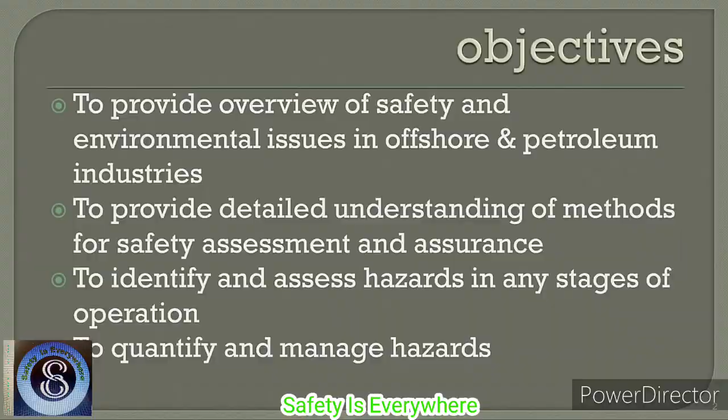One must easily understand how to quantify and manage hazards as applicable to oil and gas industries. It is very important that one should know how to quantify qualitative issues like hazard management. I will come to that in detail in the next class, because when you talk about safety you are always contemplating what is called risk.

So, there are quantitative and qualitative assessments of risk. When you talk about hazards, it is a qualitative measurement, but we must know how to quantify the qualitative measurements of risk involved in oil and gas industries. Let us, ladies and gentlemen, now introduce safety as a fundamental perspective applied to oil and gas industries.

This is a very interesting oil life cycle that you see here. The oil life cycle starts essentially from exploration. It goes to production, because once you identify the wells where there is a potential of oil to be explored, then you start producing oil. After you produce oil, you have to obviously transport this oil from the drilling well site to the place where this oil can be processed. So, obviously one will look at some crude oil pipelines.

The moment I say crude oil, you should understand that whatever oil we produce here in the well offshore cannot be directly used without processing. So, this oil requires to be processed. On the other hand, ladies and gentlemen, once you process this oil, a majority of the explored oil becomes waste, which is disposed of back to the sea, which causes a lot of environmental problems, which we will discuss in a separate module. So, crude oil pipelines are to be laid, which will transport the crude from the explored site or the produced site to the process plants.

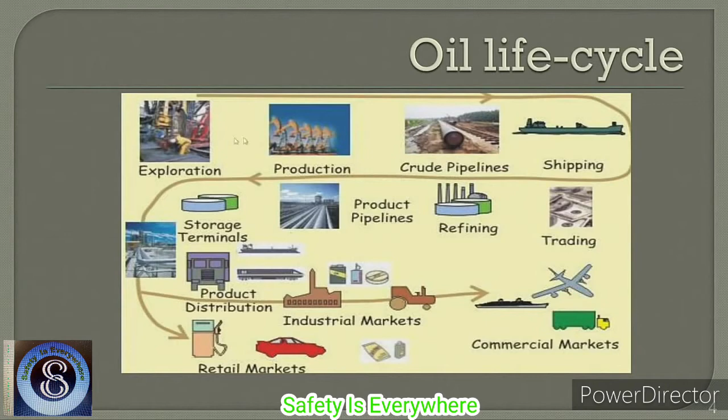You can also talk about safety in terms of design, where we talk about pipeline design. You can talk about safety in transport, maybe in shipping, maybe in commercial markets, maybe in passenger vehicles, maybe road bullets, etc. So, safety or health safety can be addressed in different segments of this oil cycle, which is very important for all of us to understand. So, in this lecture or in this entire course, we will talk about HSE perspective in different segments of what we discussed here in this slide.

Now, one can ask a fundamental question, why safety is to be assured in oil and gas industries. Every segment of a process industry or manufacturing industry demands and emphasizes safety, because safety has become an inherent law of any manufacturing unit where human or personal safety is to be ascertained. Now, let us ask this question once again, why safety is important, why it is to be assured in oil and gas industries.

Oil and gas industries make continuous technological progress. We all know this because of a fundamental reason. Oil was available at shallow depths about 100 years back. Now, oil and gas are available at deep and ultra deep water depths. Obviously, the technology used for extracting or exploring oil and gas from shallow water is completely different from that being used for deep and ultra deep waters.

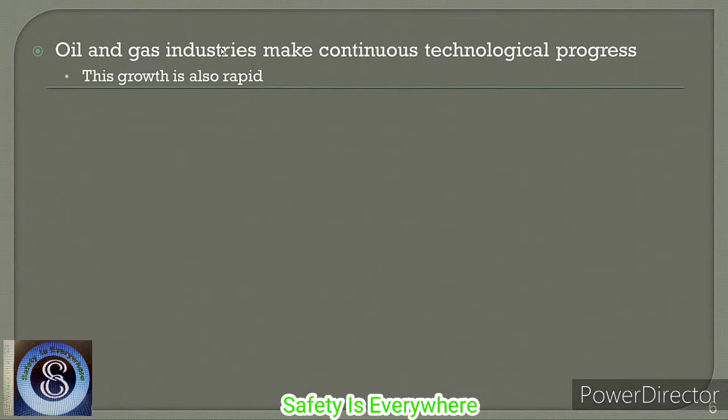So, there is a continuous technological progress made by these industries, and obviously the growth of this industry, to be proud to say so, is very rapid. It means this industry is foreseeing a very rapid state of growth in every year to come.

How does this affect safety? As I said just now, there are different complexities involved at the exploration stage, transportation stage, and also the processing stage in a given oil sector. Interestingly, the complexities involved in these stages are entirely different. The safety as applied to the exploration stage can be a different perspective compared to that of transportation and compared to that of the processing stage as well.

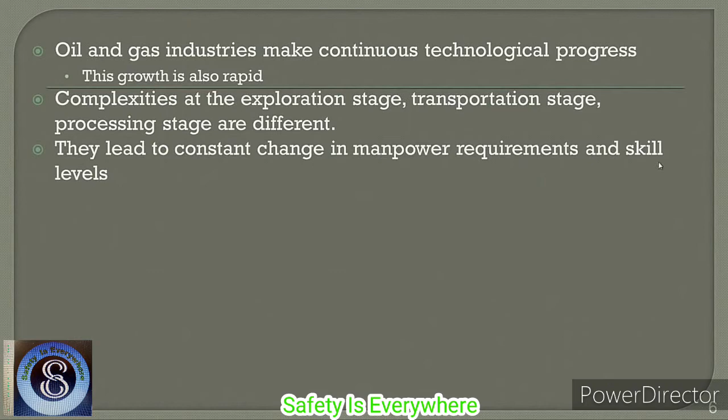Oil and gas industries, of course, lead to a constant change in manpower requirements, because the plants, equipment and machinery used for drilling in the present scenario are different from the concepts used about 50 years back. So, there has been constant technological progress in this industry, which demands a constant change in manpower requirement, and the corresponding skill level of this manpower is also constantly updated.

More interestingly, since the skilled manpower available in the sector is highly limited, this skilled manpower should ultimately have what is called job satisfaction. If job satisfaction is not maintained for the skilled manpower, then obviously this will affect the production rate of oil and gas industries. So, job satisfaction levels are relatively low, unfortunately, with offshore personnel. There are many reasons for this. Let us quickly see the important reasons which draw down the satisfaction level, in particular with offshore safety personnel.

Mainly, it is due to the risks involved. If the person working on an offshore platform is not assured that the platform is safe enough for his life, obviously he will not give a good output from his duty. There are other psychological, behavioral and physical manifestations which this person will undergo, which result in a lot of stress in his mindset. So, safety has to be addressed as a predominant factor in oil and gas industries if you really want to maintain good technological progress of this industry, which is at a very rapid rate.

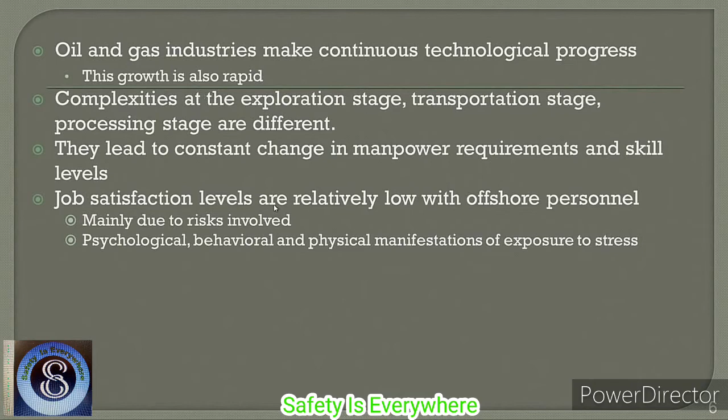The common practice is only to consider economic objectives. That is generally what every oil and gas industry looks at; though it is unfortunate, in most cases it is a fact. You look at safety only when it is challenged. You look at the safety of personnel only when he dies. So, common practice is generally to consider safety only under economic objectives, but if you focus only on this front, it may lead to de-skilling of jobs. You will not find skilled manpower available continuously for your offshore production. The most important factor is now to improve the conditions of work, making it comfortable.

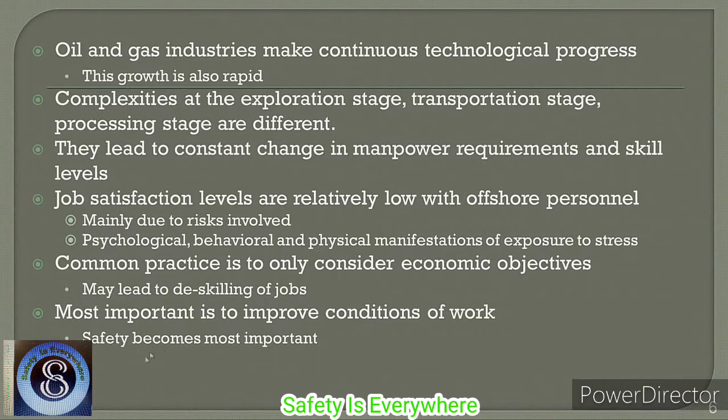So, considering all the above factors, one can realize that safety becomes most important in oil and gas industries. It is interesting to know that Ayn Rand said a creative man is motivated by desire to achieve, not by the desire to beat others. There is an Irish poet, William Butler Yeats, who says, do not wait to strike till the iron is hot, but make it hot by striking.

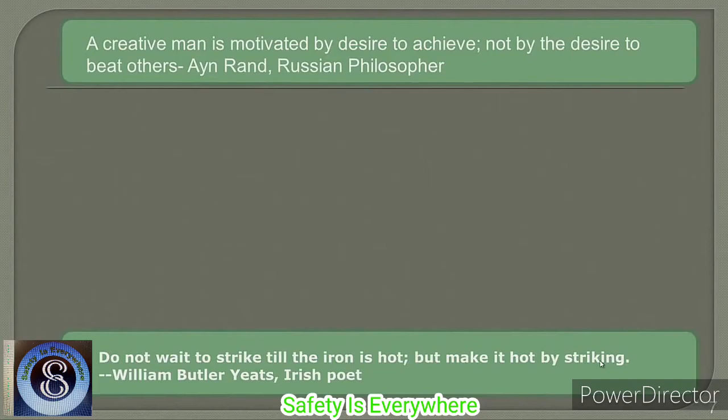It is very interesting that oil and gas industries do not wait for an infinite period of exploration. Exploration rate has to be on the higher demand. Therefore, the technological update of the progress has got to be continuously maintained.

But this will unfortunately lead to a lot of physical hazards and new unperfected technologies, because you are trying new technologies to rapidly expand your production, which may not be completely perfect for a given scenario. Those technological updates which are continuously and not completely tested may lead to a lot of physical hazards, which will lead to a fear of compromising safety.

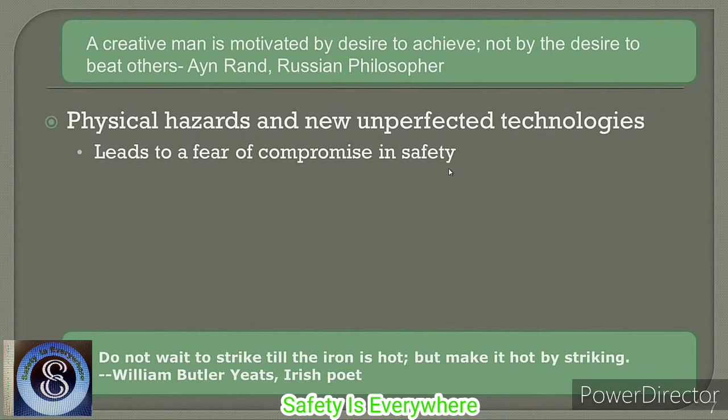That is very important. Generally, when you start developing a new technology, safety should be an inherent part of this development, which is a general practice. But unfortunately, in oil and gas industries, you do not have enough time to test these kinds of unperfected technologies before they are tested for safety, because there are very many environmental reasons why these technologies actually fail.

Therefore, health in HSE not only refers to personal but occupational health, improved living conditions, psycho-social factors and hygiene. All of them put together is what we call health in HSE.

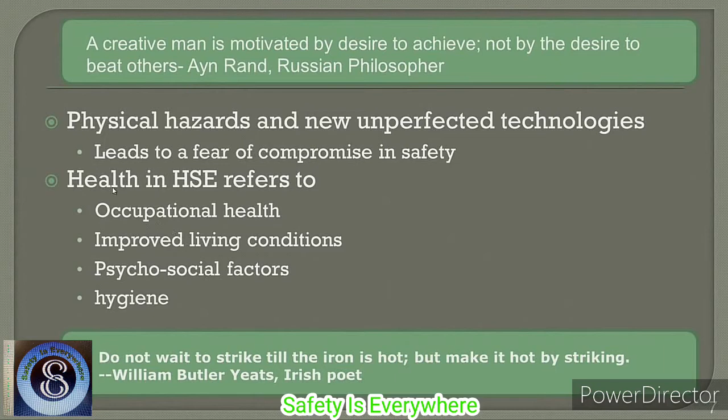One can ask me a question, why are oil and gas industries so much bothered about personal safety? Why does one have to bother so much about safety? The record of accidents in oil and gas industries is only a few. That is advantageous, it is meritorious, one is glad to know this, because the reasons are either they are not reported since they are a near-miss event, or unfortunately and interestingly they are not documented.

Ladies and gentlemen, please understand that oil and gas industries are one of the industries where risk is constantly involved in every production stage. But the record of accidents may not be there because of these two reasons. It does not mean that accidents do not occur in oil and gas industries. Therefore, one cannot say I will not bother about safety so much.

Now, one can ask me another question indirectly: when accidents are not reported or do not happen very frequently, this results in a simple phenomenon called lower frequency of occurrence. Though these accidents are of a very low frequency of occurrence, on the other hand they do not occur very frequently, maybe once in a year, maybe once in 2 years.

But that does not save you from worries, because even though they occur once in 2 years, the consequences caused by these accidents are phenomenally high. Now, one can ask me a question, how are the consequence and the frequency linked? The product of these two, ladies and gentlemen, is what we call risk.

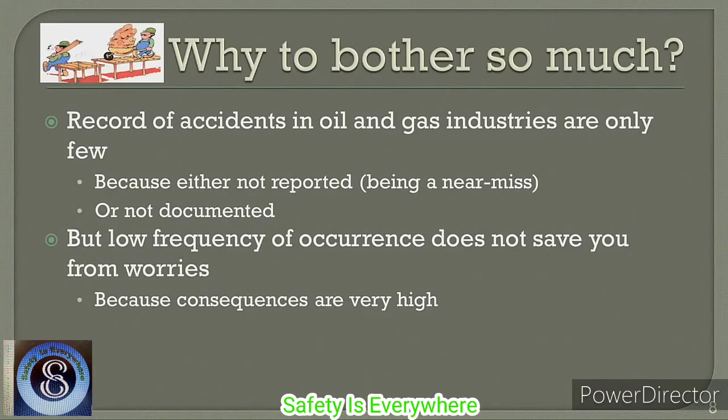Now one can have a doubt in mind how risk and safety are connected. We are talking about safety, why is risk addressed here? Ladies and gentlemen, it is very important to know risk and safety are complementary. Safety is a qualitative statement, risk can be quantified. So any subjective statement like safety cannot be mathematically modeled, but any quantitative statement like risk can be mathematically modeled. So if I can model risk, I can always address safety indirectly.

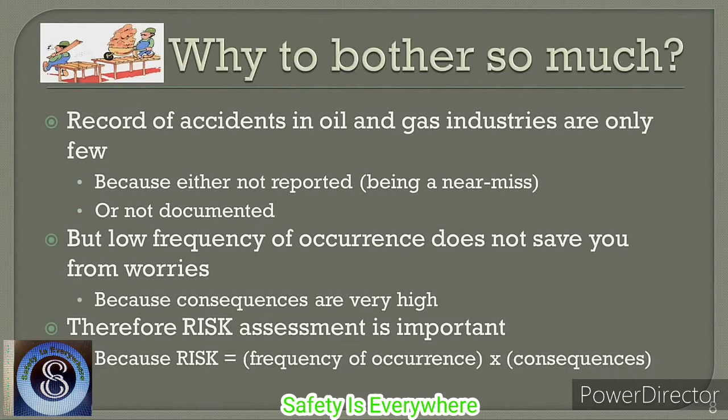Therefore, risk assessment becomes important because risk is nothing but the product of frequency of occurrence multiplied by the consequences of these occurrences. So though the frequency can be very low, the consequences are phenomenally high, therefore the risk level involved in offshore industry is phenomenally high. Since the risk involvement is very high, one must bother about safety in oil and gas industries.

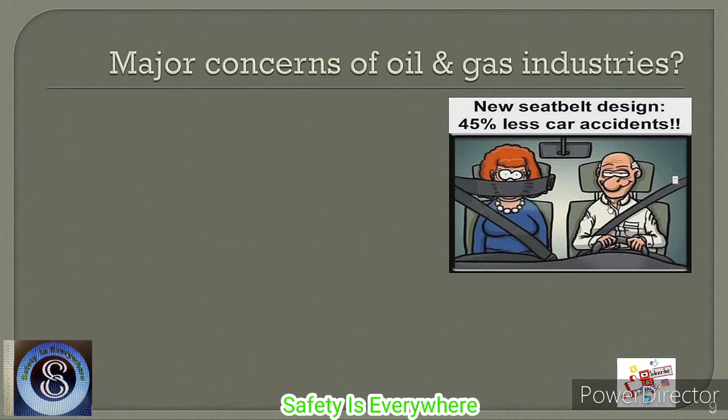Interestingly, let us talk about a parallel problem like road accidents because of not wearing a seat belt. Now you must know many countries, many legislations have made wearing of seat belt compulsory. Look at the design, it can always be another new pattern of design where you don't allow your counterpart to talk, so that you can drive safely. But is it a good design of seat belt? The question is, what are the major concerns of oil and gas industries where I can come up with a new design which can be safe?

Now we all understand that the nature of work involved in exploration, transportation, etc. is hazardous in nature. There are risks involved in every stage of this production. The risk of accident occurrence is always high. Accident prevention makes more sense.

Therefore, instead of addressing how accidents do not occur, let us try to see what are those reasons or factors which can cause accidents that can be prevented. Once we talk about factors, we must understand these factors can be both financial and humanistic.

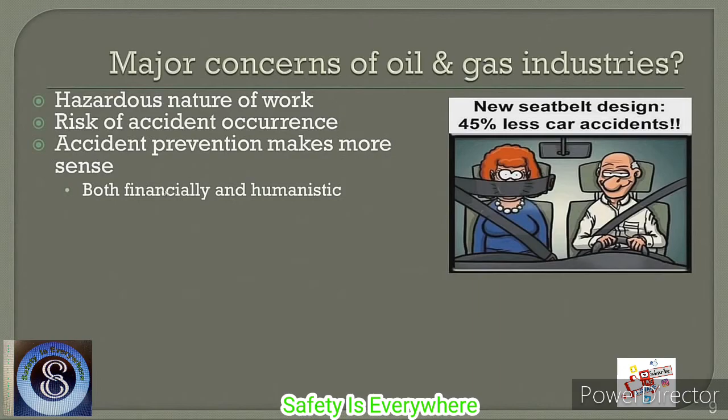So I am not talking about only personal safety, I am also talking about the investment, the economic safety as well of the industry. So one must take proactive measures, which are very important compared to the reactive approach.

Generally safety in other process industries is considered as emergent out from past accident scenarios. This is addressed as a reactive approach, whereas in the oil and gas industry safety should be a proactive approach.

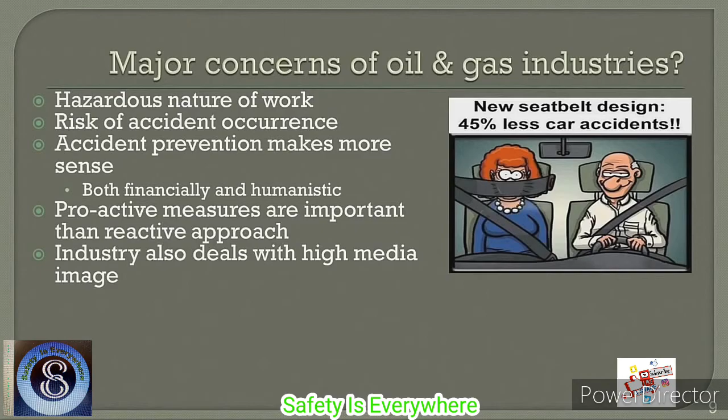You must also understand that every oil and gas industry deals with a very high media image. It is very important that the company maintains its image in the public domain. To maintain this image, the company has to also say that there are very few accidents or no fatal accidents in the last consecutive years, because the image of the industry in the public media becomes very important.

There are two reasons for this. One, the company can market the product well. Number two, the company can attract highly skilled professionals for improving their production rapidly.

Oil and gas industries also have a reputation of self-regulation. It is very important and interesting to understand that compared to all other process industries, oil and gas industries have a very stringent self-regulation on safety perspectives.

Recently, many unmanned platforms for smaller oil fields are being developed in the North Sea. Therefore, safety should become an inherent product of design and development, so that accidents do not occur. Even if they occur, the consequences of these accidents are as minimum as possible.

Let us ask a question now. If the oil and gas industry views safety programs very seriously, let us quickly say what we understand by review of safety. There are two basic regimes available when you want to review safety: one is what we call a goal setting regime, the other is what we call a rule based regime. Let us quickly understand the difference between the two.

Goal setting regime makes the duty holder responsible and he will assess the risk. Management will not intervene directly. The duty holder needs to demonstrate the understanding of the risk himself, he has to be careful. So the onus is on the individual.

It keeps pace with new knowledge and development, because the trainer or skilled professional will be updated about all risk factors involved in the equipment and plants. Therefore, there is constant new knowledge being fed to this personnel, and that makes it a goal setting regime. This gives a lot of opportunity for the workforce to engage in the larger sector.

Whereas, consider the rule based regime, where the management takes all the responsibility and imposes safety regulations on its employees. So they set a rule or set of rules to be framed, and they need to be followed meticulously. The focus is only on compliance, not on the outcome. That is very unfortunate, but that is a fact.

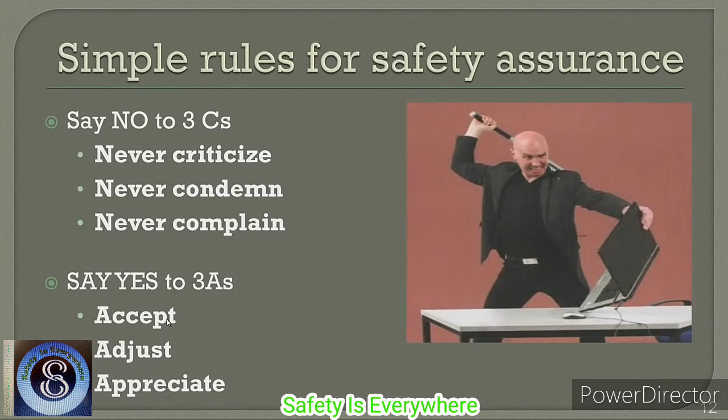Let us frame some basic rules for safety assurance. Rule 1: say no to 3 C's: never criticize, never condemn and never complain. Say yes to 3 A's: always accept, always adjust and always appreciate.

Rule 2: objects in the mirror are closer than they appear. It is a constant statement you see in every mirror of an automobile vehicle. Let us remodify this statement for the oil and gas industry: problems are smaller than they appear when you actually begin to face them.

Rule 3: whatever goes, gracefully let it go. Whatever comes, gratefully accept it. Gracefulness and gratefulness flow with the flow. Do not try to intervene.

Rule 4: nobody is useless. My dear gentlemen, you are just used less. So keep this in mind and try to contribute. Either use yourself or find someone who knows how to use you properly.

Rule 5: always hold yourself to standards higher than expectations. In everything, take an extra mile. Try to contribute individually, even if it may be a small percentile of the progress of the industry.

Rule 6: a diversion cannot stop a journey. This statement always enables you to continue the journey, but the journey does not stop with the statement. Same way, temporary setbacks in oil and gas production should never alter your focus. So be encouraged, keep going and keep on going.

Rule 12: define smart risk. Try to distinguish areas where risk is encouraged and where it is not. For example, minimize execution risk, take more discovery risk. So one can always encourage risk, but execute it with great care.

Innovation of course requires a lot of tolerance for risk taking and learning from failures. So, a risk averse culture will not result in progress. Ladies and gentlemen, if you do not take risk, there is no success, but risk is contrary to safety. So, I am saying otherwise, take safety as a challenge and implement it successfully.

That is important because the oil and gas industry has to face this risk every day of production. I am proud to be associated with this industry; this is the only industry in the world which takes risk as the bread and butter of the everyday job. That is very important. With all that, the number of accidents is on the declining side in this industry. So, this industry looks at safety as a very important target, there is no doubt about it.

So, my contribution to these lectures is only that, to the people listening to these lectures, safety is inculcated not as a literature, not as a language, not as a subject, but as a practice. You have to adhere to this, feel this and implement it as far as possible. You should always try to define what risk taking really means. You cannot always attempt risk in the execution stage and cause a safety challenge to the company.

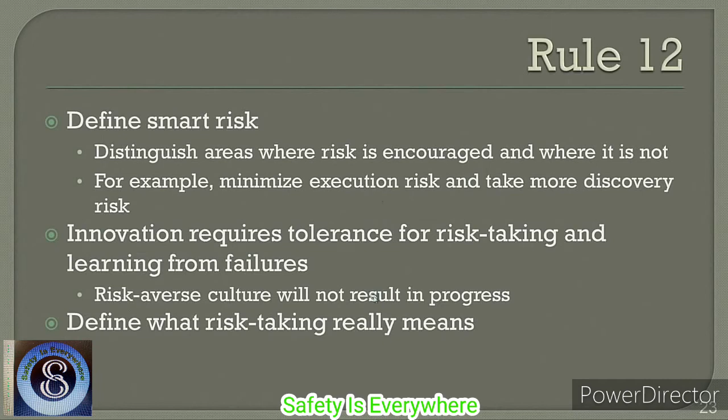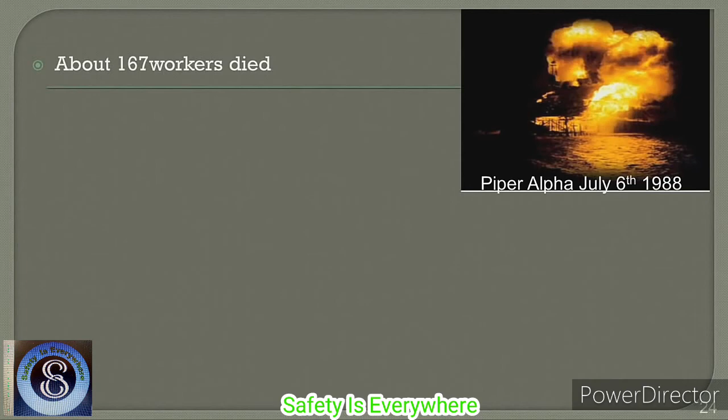When you ask about the different accidents that occurred in the oil and gas industry, one generally remembers the Piper Alpha incident that occurred on July 6, 1988. Interestingly, the stats show that about 167 workers died in this accident. The investigation report showed very clearly a lack of competence in managing the emergency, ineffective systems were in place, uncoordinated response teams were deployed. There was a lack of basic offshore survival skills and knowledge among the people working on board. Falsified training records were produced and certificates were issued.

Safety, skills and competence have grown to high priority as a result of this accident. The Offshore Safety Division started enforcing major changes in workforce preparedness after this incident occurred. So, there are good lessons and bad lessons learned from this incident. Lack of competence in managing the emergency and uncoordinated response can be considered the two most important reasons why this accident resulted in the fatal end of 167 people.

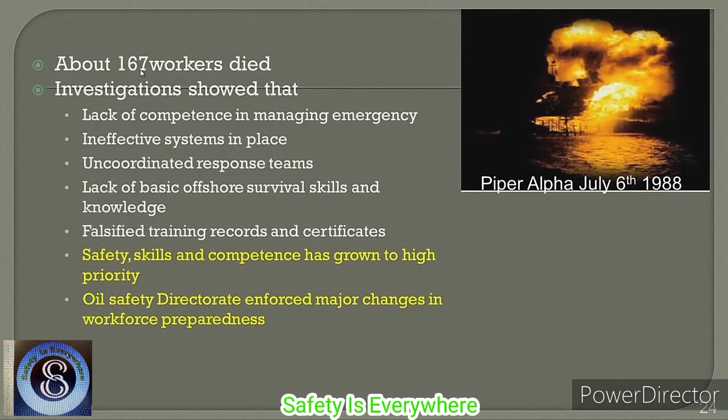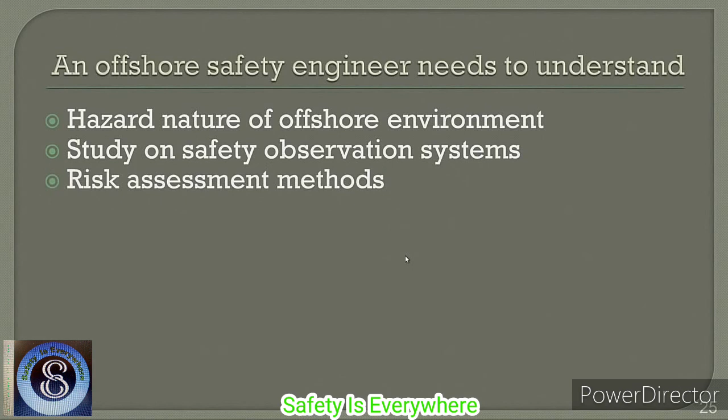Therefore, an offshore safety engineer needs to understand the following. The hazardous nature of the offshore environment should be understood thoroughly. He has to understand the safety observation systems. He must do detailed studies on safety observation systems. He must go thoroughly through the mathematical methods available for risk assessment. He must take the tasks that require permit to work only.

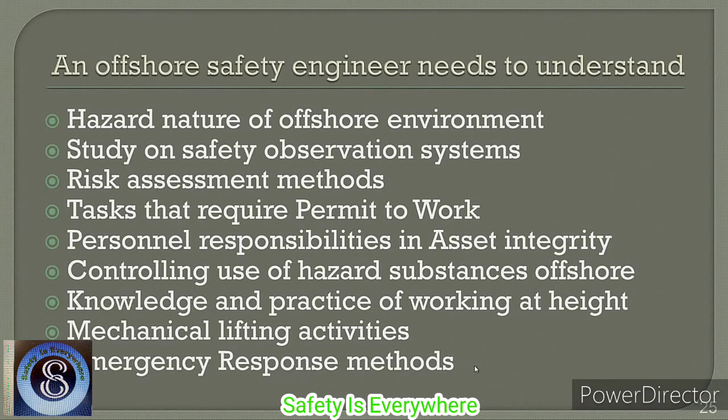There are many benefits derived from implementing these kinds of safety standards. What are the employer's benefits? There is improved safety, improved competency, improved efficiency in production, and overall protection of the environment. The employee's benefits are that he gets a good and healthy environment, his personal safety is assured, good payback incentives because the company is making good profit out of him, there is good production, an improved work culture because it is safe and assured, and therefore he develops good coordination because he is by and large happy.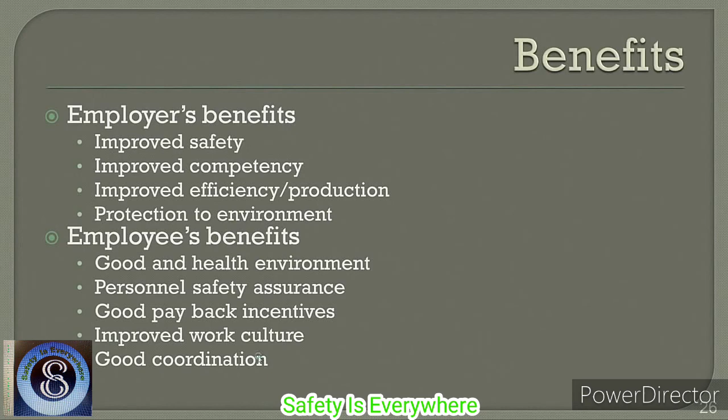So, this lecture has summarized why safety is necessary, what the different rules of safety are, how safety can be practiced, what the golden rules to practice safety in oil and gas industries are, and more interestingly, what benefits would be derived if you practice safety from the employer's perspective and from the employee's perspective.